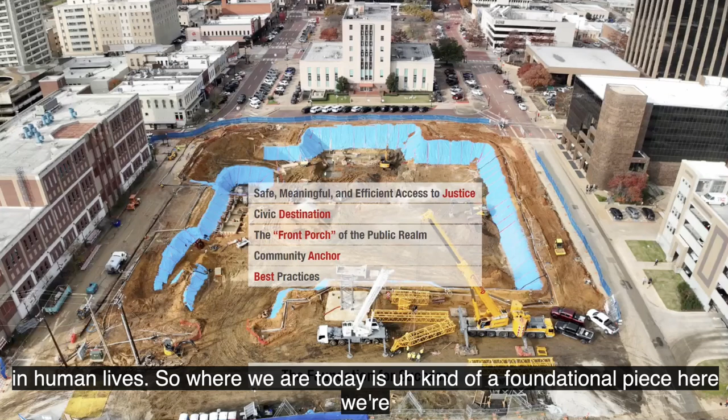So where we are today is kind of a foundational piece here. We're talking about an analogy, but we've got a foundation going on outside in construction, and we also want to talk about the foundation of the building process and how important it is to have a good plan in place and what that means for success for the project. We have several pillars we're working through, but our main pillar is safe building design, meaningful and efficient access to justice.

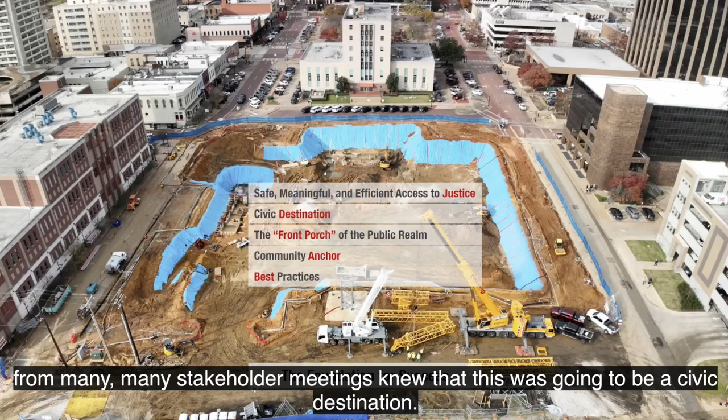We also, from many stakeholder meetings, knew this was going to be a civic destination. Our community wanted this to be a front porch to the public realm, and it's a community anchor. We're also going to talk about best practices.

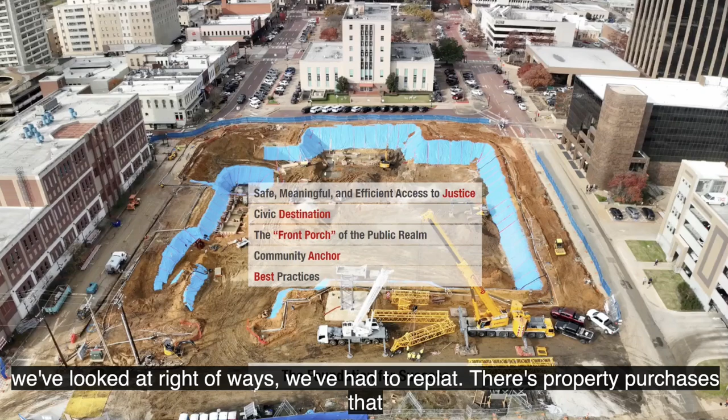The items you see in this view alone, and the due diligence that's gone into this - there's been talks with the railroad, Union Pacific. We've had to work on soils testing, geotechnical testing. We've worked with the city on joint agreements. We've looked at right-of-ways, we've had to replat, there are property purchases that have gone into place. There's a list a mile long of the orchestrated and collaborative effort that gets us to this point, which we'll look at as well.

I want to talk about the role of an architect in a project like this, because a lot of times we don't explain that, and I want to make sure everybody understands the architect's role here and what we bring to the table - that we ensure the owner's interest, Smith County's interest. We're here to ensure the project's success, to deliver a high quality, functional, safe, and aesthetically pleasing building that aligns with Smith County's vision.

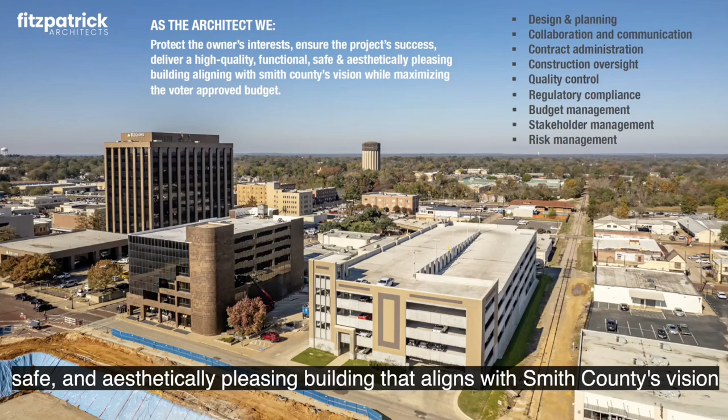While we maximize the voter-approved budget, what that means is many people think the architect is just the designer, the planner, drawing the pretty pictures. But behind the scenes, we also are the liaison between the owner, the contractor, the stakeholders. We communicate with all the engineers on site and make sure hundreds of stakeholders and professionals are all headed towards the same goal.

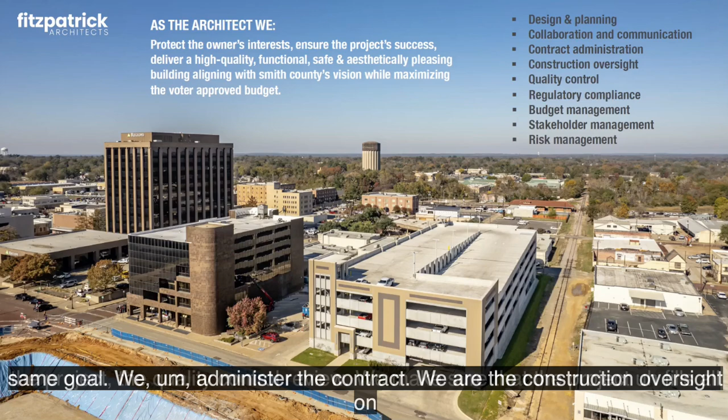We administer the contract. We are the construction oversight on the project, the quality control review. We make sure the project fulfills all regulatory compliance requirements, meaning Jail Commission, Texas Historic Commission, and Texas accessibility laws. We also manage the budget and make sure there's budget oversight so that we stay within the $179 million voter-approved budget.

We manage stakeholders, hundreds of stakeholders. We've had many stakeholder meetings and workshops on this project, including IT, security, the clerks, the judges. We've made sure everybody's voice is at the table from multiple workshops, making sure those pieces are implemented into the design. We are also here for risk management, looking ahead and making sure we're looking out for things that could hold us up.

I wanted to give you a little bit of a personal note on this. Part of our team is here: Daniel Romo and Abby Schluterman are co-project managers on the project.

This is just an example of our grouping at the office, where we were the control center for at least 80 plus engineers and specialists on the project. We worked in a room, kind of a control room like this, each involved in a separate focus on the project, whether it be site, structural, mechanical, electrical, plumbing, security, or detention standards. All of us managed those pieces with engineers and specialists.

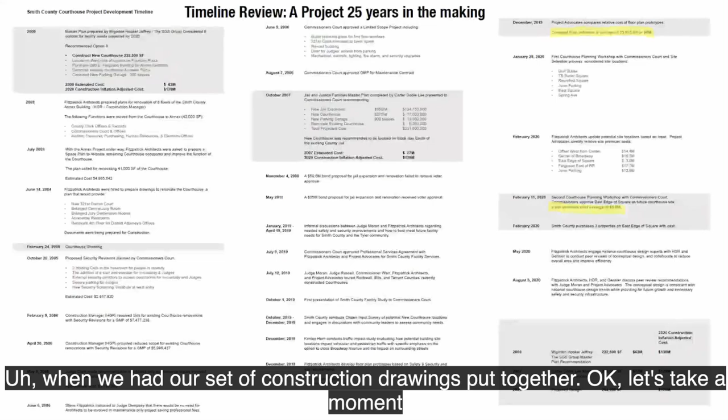Okay, let's take a moment and pause to look back at the timeline for the project. This is really a 25-year project in the making. Looking back at the overall timeline, this was a slide we looked at in 2019, going back to where we began in 2000. The highlighted gray areas were some milestones along the way. In 2000, 2007, and then starting again in 2019, we had three independent studies for what we should do with the courthouse.

Like we mentioned, in 2005 there was a courthouse shooting, and we began to see the trend that every time we had an independent study, we came up with the same requirements. We needed a new courthouse of about the same size we were projecting. We needed a new parking structure to handle everyone coming to downtown, and we looked at the budget and what that looked like.

In 2000, an independent entity prepared a study. In 2007, another independent entity conducted the same study with the same result. Then again in 2020, all roughly within that same 230,000 to 280,000 square foot requirement is what we needed, within a $125 million to $140 million project at the time. That's the 2020 construction numbers, which is what we call the total project cost, and we'll get into that in a moment.

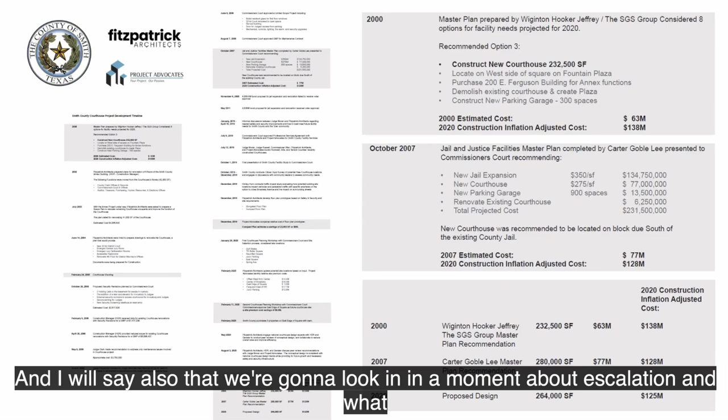Total project cost versus construction cost alone. I will say also that we're going to look in a moment at escalation and what inflation has done over the course of the timeline.

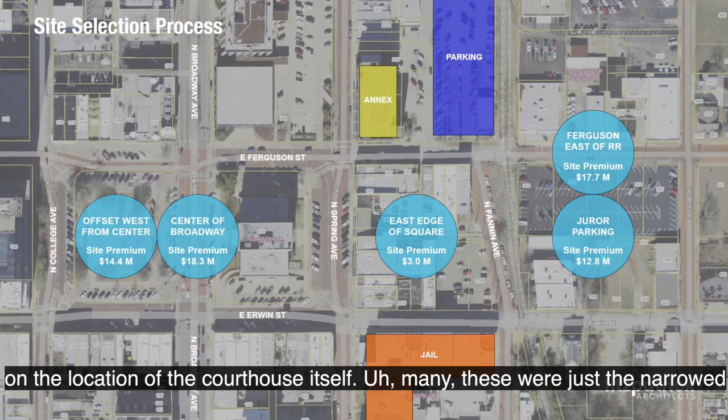After we looked at those studies, and we were charged in 2019 to start a new study, we came to the Commissioner's Court and had many workshops on the location of the courthouse itself. These were the narrowed down pieces where we looked at the best place. We looked at an elongated plan in the center of Broadway, and we looked at other places on the east side of the railroad tracks.

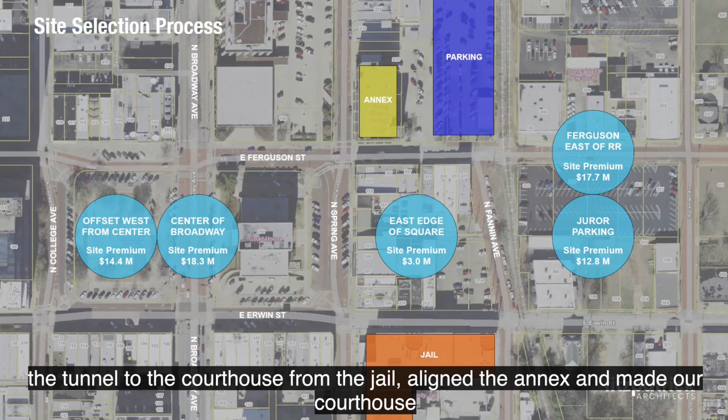But what it came down to was safety, security, and what would make Smith County the most efficient. So the east edge of the square was the selected site, primarily because it achieved the tunnel to the courthouse from the jail, aligned with the annex, and made our courthouse complex efficient. It was the site premium where the tunnel saved—out of all site locations, this one would save taxpayers about $10 million in tunnel construction.

We looked at the design and aesthetics of the previous courthouse and the stakeholders at the public workshops we had, and how important it was to look at the historical nature and details of that project and incorporate some of that language into the design of the current courthouse.

We looked at elongated plans, similar to this building, versus a more compact plan. We looked at the efficiencies and found a more compact plan was more efficient. It cut out about 25,000 square feet and saved the taxpayer, in today's dollars, about $10 million by going from an elongated plan to a compact plan.

So right off the bat, we're looking at ways to maximize the taxpayer dollar within the approved amount. In implementing best practices, once we had that site prepared and we knew that's where we were going, we were looking at a compact plan, and we wanted to look at what are the best practices for site design.

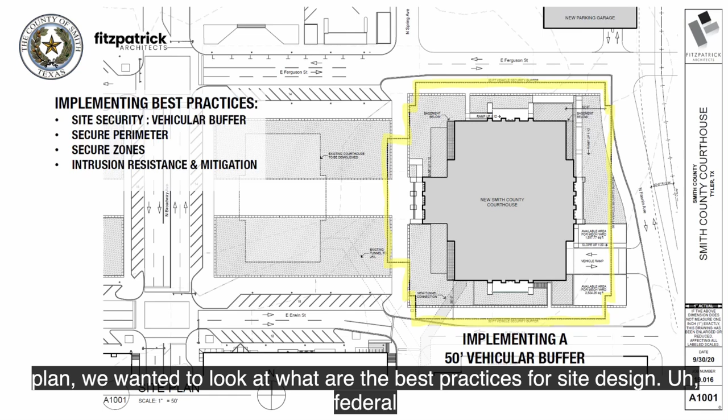Federal courthouses have a requirement of a 50-foot vehicular buffer around the perimeter of the courthouse. It's not required in county courthouses, but we wanted to see if we can implement that and provide the best practice for a vehicular threat to the courthouse. The yellow line represents that vehicular buffer. We were able to achieve it with that compact plan, working with the city and the county together to have Spring Street as a closed right-of-way, and how we can then achieve that vehicular buffer on the west side of the courthouse.

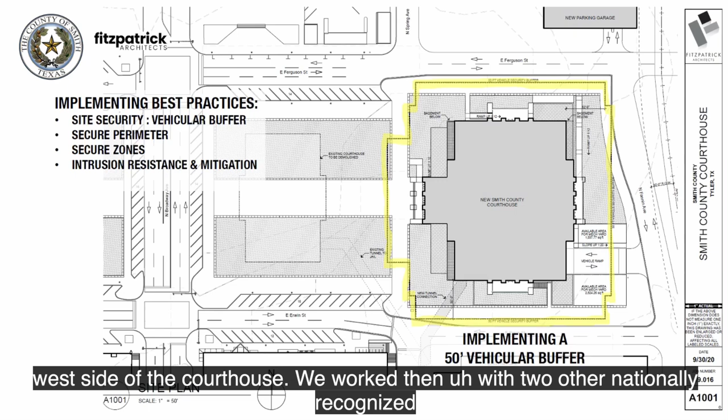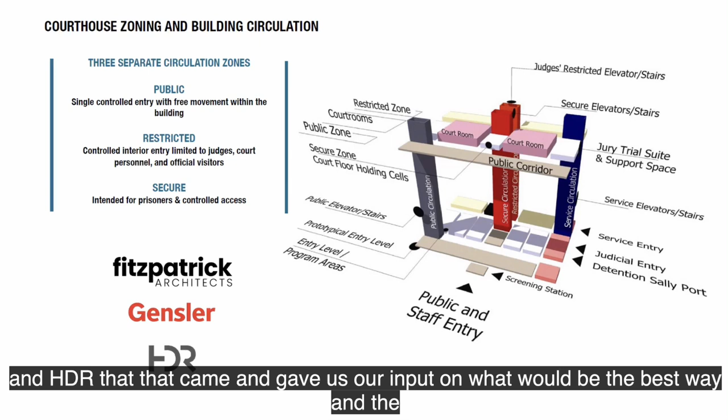We worked with two other nationally recognized firms, Gensler and HDR, as consultants to look at the security of the courthouse and the initial design of it. We worked on the main pieces that are the backbone of the design, which are the separate circulation zones, what our courthouse is missing now: three separate and distinct circulation zones for public, restricted, and secure. We had these peer reviews with our consultants, Fitzpatrick, Gensler, and HDR, who gave us input on the best and safest way to lay out this building.

We wanted our building laid out very much like this: parking and secure parking on the lower level, high traffic levels on the first and second floors for the public, court levels on levels 3, 4, and 5, and then our court on the 7th level, which we'll look at in just a minute.

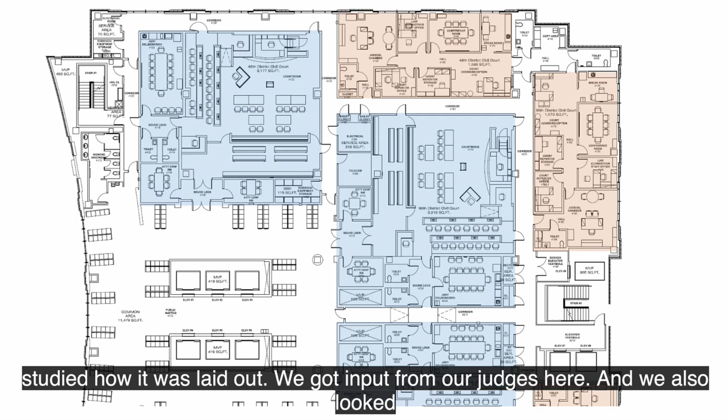Continuing on in this early stage, part of our best practice research was site visits where we looked at courthouses that had implemented best practices. For instance, we went to Tarrant County, Rockwall County, and Waxahachie County, and looked at the good, better, and best versions of security and how that was implemented. Tarrant County's court we really studied how it was laid out. We got input from our judges here, and we also looked at how judges' chambers and that restricted access was laid out there.

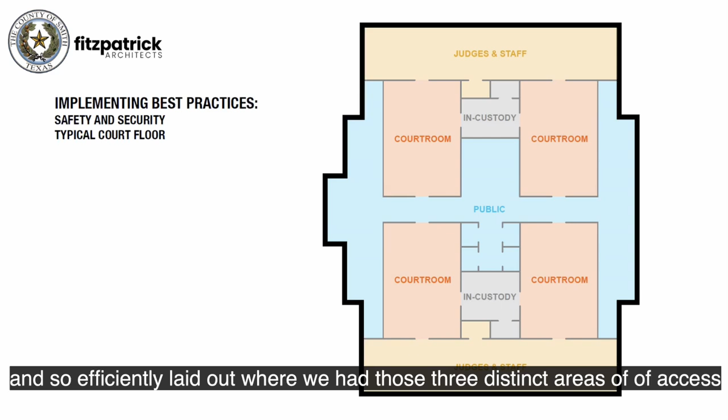We looked at the design, how the clerk spaces were designed, and then started implementing those into an early schematic design with the court floor, designed so efficiently that we had three distinct areas of access for the public, in-custody individuals, judges, and staff. Those three distinct circulation paths never cross, which is the best practice for security design. They don't cross vertically, and they don't cross horizontally.

We also knew, hearing from all the stakeholders, that this building needed to be a 75 to 100 year long building for generations to come. So that's also a piece we considered when looking at material specifications and the quality of the construction in this project, and what that means for the future.

So we had done all of that work and research. We had worked with Project Advocates, a third-party project manager at the time, for budget projections. We had done research with HDR and Gensler. It was time to talk about the potential to finally take this to the taxpayer with a bond vote, because that had never been done over the course of the last 25, or 20, years at the time. When we looked at the projections and thought about what was optimistic, probable, and conservative, we were hitting about $125 million total project cost in 2020.

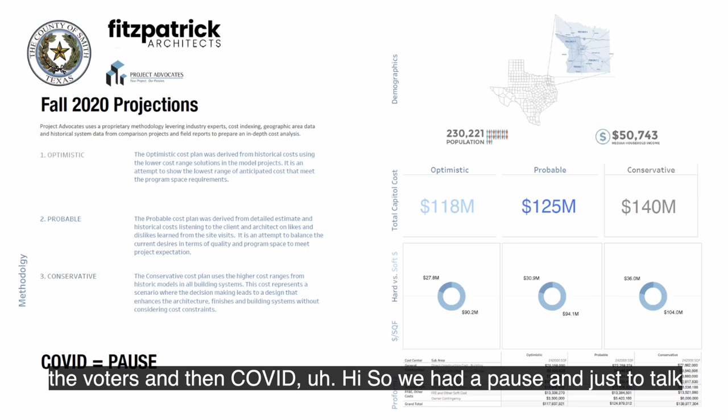And then, as you all know, we were about ready to go to the voters, and then COVID hit. So we had a pause, and I want to talk a little about what that did for us in terms of time and budget. The pause during COVID lasted until we resumed in May of 2022 to talk about going back to the voters again.

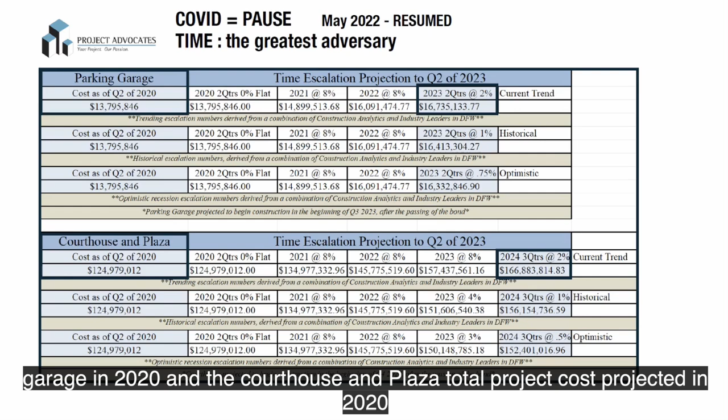This is an example of the parking garage and courthouse and plaza total project cost projected in 2020. As you can see, over the course of the 3 to 4 years until actual construction would have started, that escalation was going up about 8% per year, and the projections now were about a 28% increase over that time.

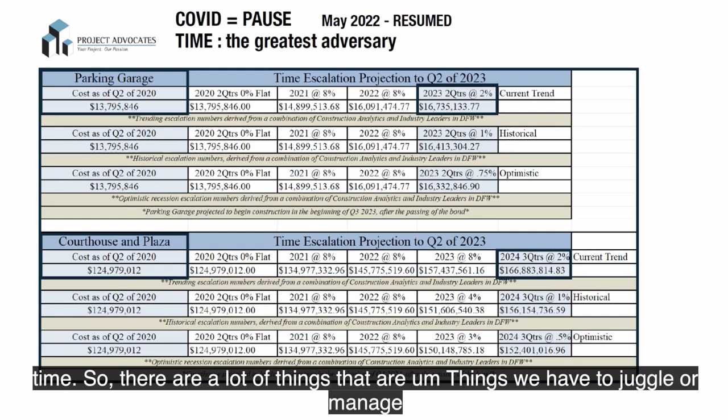So there are a lot of things we have to juggle or manage with the budget. But honestly, our greatest adversary was time. Time is what makes the budget increase on the construction project because of escalation.

So in May of 22, we did a projection looking at what the total project cost would be for the courthouse and the parking structure. This was forecasted at the time. The $125 million in 2020 would now be a request for a roughly $160 million building, and the $14 million projected garage at the time would end up being about $16.7 million.

That was decided at the time. Then the voter ask would be the $179 million, and you can see the estimated total project cost for the courthouse. Today we'll find out where we are actually on the parking structure, at $15,135,000, which is a great improvement. We were able to save and have a great improvement on the budget there.

So from that point on, voters approved the $179 million in November of 22. Starting then, and especially in January and in the spring, we started looking at a project delivery method that would complete a sort of checks and balances with the architect, owner, and a construction manager at risk.

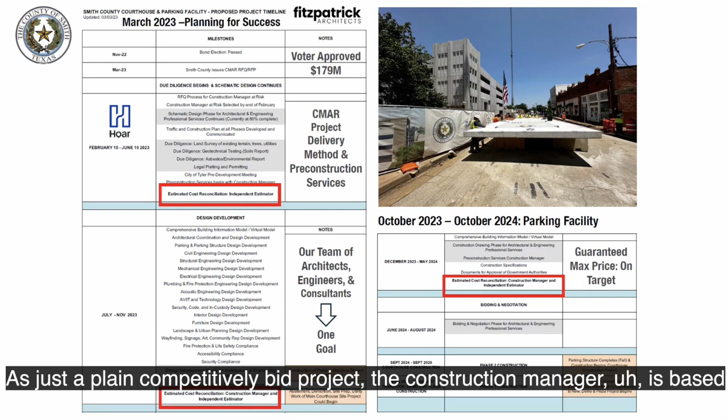A construction manager at risk is different from a plain competitively bid project. The construction manager is selected based on qualifications and fee, and comes onto the project early. What that does for us is he starts planning and doing pre-construction services which project the budget for us, getting real-time input from subcontractors. That puts us on track for milestones.

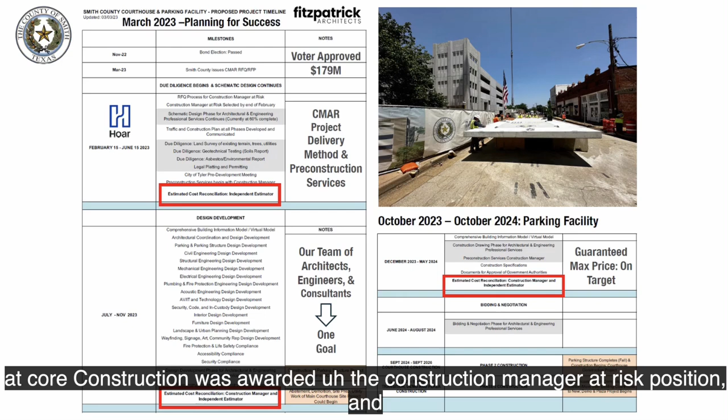So immediately when Smith County went out for the RFQ process, many contractors were looked at. Hoar Construction was awarded the construction manager at risk position. That became the project delivery method, and pre-construction services began.

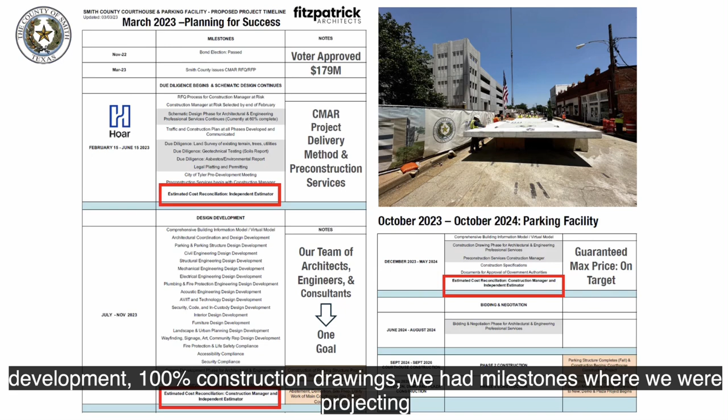We all started working on budgeting through the schematic design process, through the due diligence process, and at each milestone—100% schematic design, 100% design development, 100% construction drawings—we were projecting and double-checking that we were staying within the bumpers of the voter approved amount. In addition, we had a third party construction economist come on board to triple check us, and we had cost reconciliation meetings at each milestone to make sure we're all in alignment, because we wanted there to be zero risk on bid day.

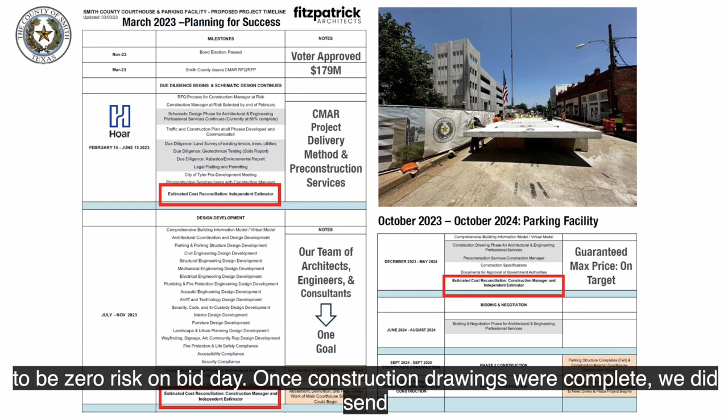Once construction drawings were complete, we sent out the drawings for a competitively bid process. Another benefit of the construction manager at risk is that when you receive competitive bids back, those are vetted, and the construction manager then gives the county a guaranteed maximum price. That is critical to the project—that's why it's called construction manager at risk. We'll talk to our friends at Hoar in a minute, but what that means is they've taken on the risk to ensure we have a guaranteed max price and to deliver this project within that amount.

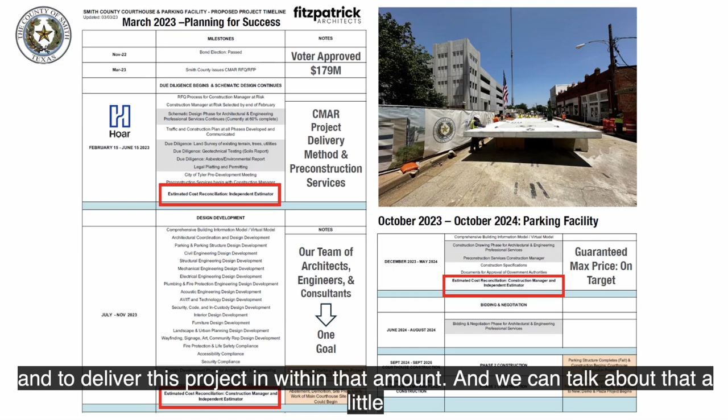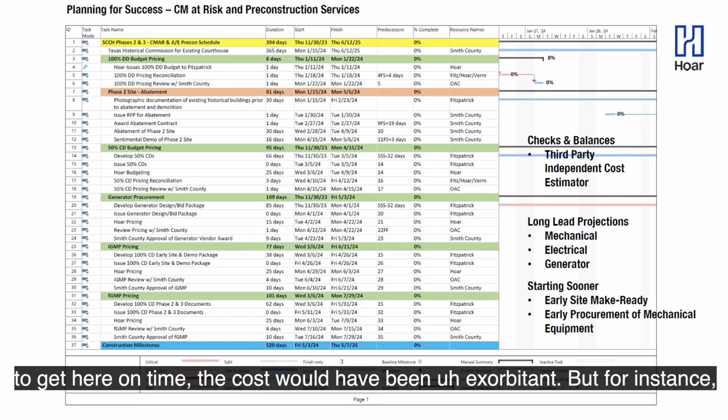Once Hoar came onto the team, we started looking at pre-construction milestones—abatement, budget pricing. One thing I want to point out, another benefit of pre-construction services, is that there are long lead time items, like the generator, mechanical systems, electrical systems, that if we had waited and bid those out, the lead times would have been impossible to get here on time, and the cost would have been exorbitant. Because Hoar recognized that a generator would have such a long lead time, we were able to go ahead and purchase that and have it on its way, so we could save the taxpayer dollars. That's what I mean by time being our greatest adversary when it comes to budget on a construction project.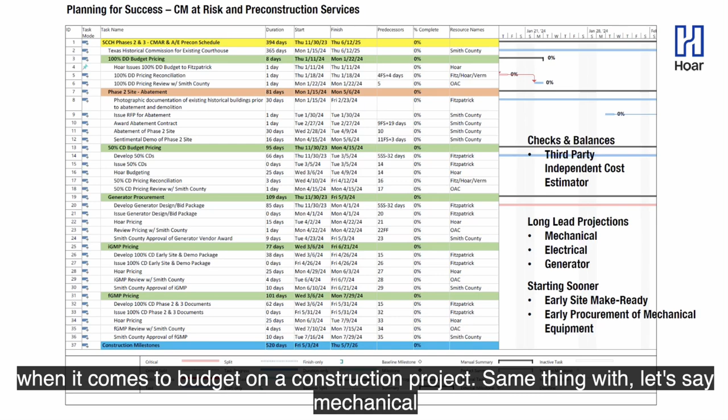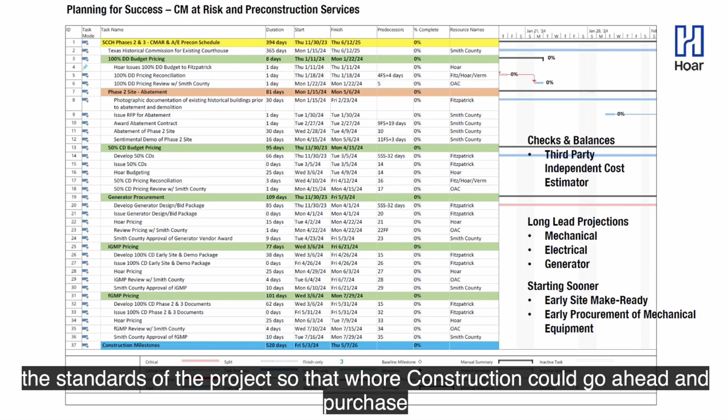Same thing with mechanical equipment—it was about to be procured. We get submittals into our office to review, to make sure they match the specifications. We found out that if we waited until this January to procure the mechanical equipment, there would be a huge cost increase at the first of the year. So it was in our best interest, and our team of mechanical engineers worked throughout the Christmas break, checking all the submittals, making sure everything met the standards of the project, so Hoar Construction could go ahead and purchase those pieces prior to January, so we did not have that cost increase and it would not impact the project.

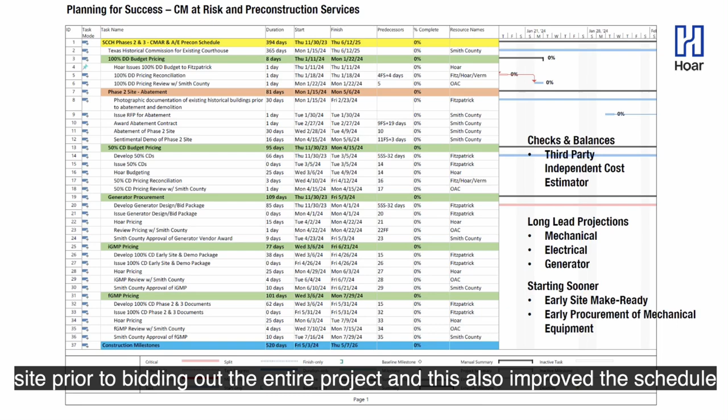Last example, because time is our greatest adversary, we looked at ways to improve the schedule and not have such a long project. Hoar Construction came up with the idea for an early site package where we would start a make-ready site prior to bidding out the entire project, and this also improved the schedule and saved dollars in the project.

A little bit about Vermeulen's, who is our construction economist and third-party person who came on board and did cost reconciliations for milestones throughout the project. They're a leader in the industry, and they came on board, and this is just an example of how this happened.

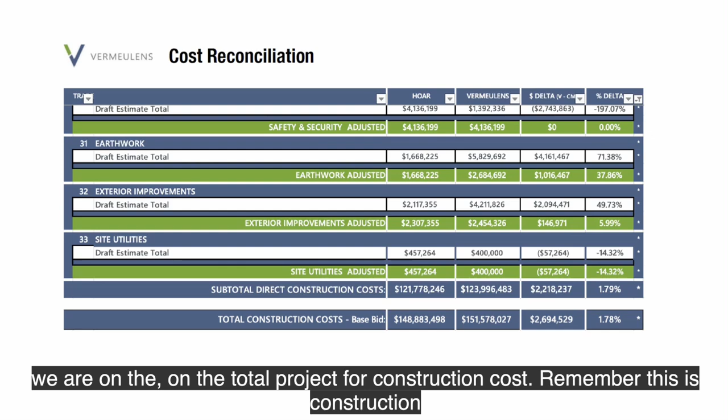Hoar's projections, remember this is still pre-construction. We projected each scope of work, let's say earthwork or exterior improvements or site utilities. Hoar Construction would project those pieces of work, and then once all those scopes were added up, we would total and say, okay, here's about where we look to be on the total project for construction cost. Remember, this is construction cost alone.

Then Vermeulen's would independently and separately take the same drawings and do the same exercise without any input from us, using their own historical data. Then we would all come back together and see where Vermeulen's was, and say, okay, how far apart are we? Where have we missed things? What's a trend that we're not seeing?

For example, this design development estimate, Vermeulen's was about 1.8% over where we were projecting. And I will say each time Vermeulen's was over where we were projecting. So what we would do is ask, what are you seeing in the industry that we're not seeing here? That would be part of the cost reconciliation, but it gave us all a really good check and balance of where we're going before we bid.

This is an example from about a year ago, almost exactly a year ago, when we were all orchestrating the very day to the very week of what we were going to be doing to get the project underway. We were looking at the parking structure. We were looking at talks with the Texas Historical Commission. We were documenting historic documentation of the existing historical buildings. We were doing price reconciliation that I just described, the parking garage.

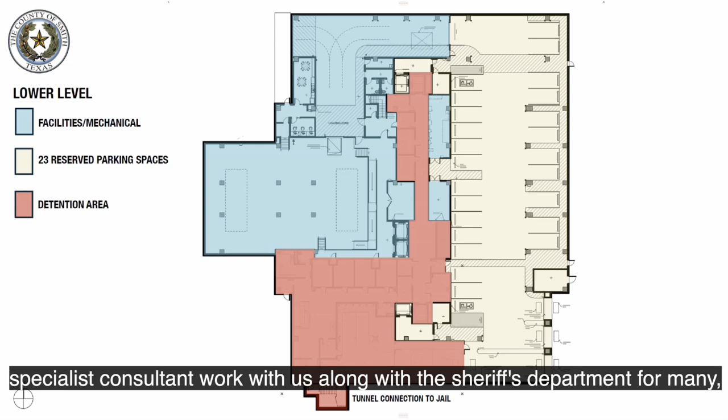Just a quick reminder of what that 268,000 square feet is made up of. We'll quickly go over these floor plans. We have a lower level on the site that is a detention area. We've had our detention specialist consultant work with us along with the sheriff's department for many meetings, along with Don Bell and IT on how all of this fits together. That same lower level is a secure parking level, and we also have facilities and a mechanical area downstairs in the basement level.

On level 1, we have 2 secure entrances, the public entrance on the west and the light blue staff entrance on the north. All people coming into the courthouse for safety and security will be scanned, and we have that set up so employees come in from the north and from that parking structure, and the public comes in from the west. We have a security office right at check-in, and then the district clerk in the northeast portion.

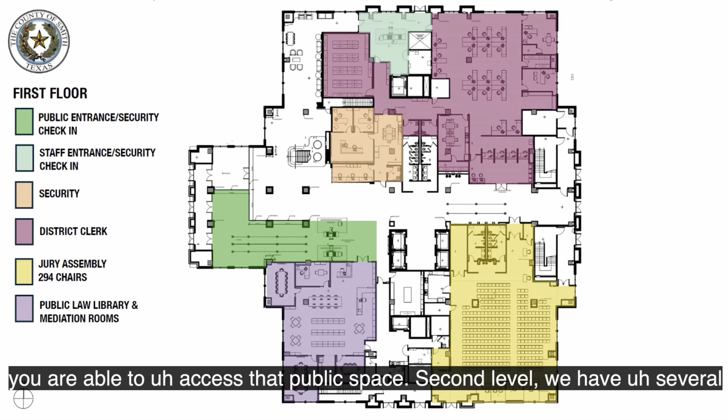And the jury assembly with 294, expandable to 300 chairs, in that multi-purpose space. Those chairs can be taken up and put back out in whatever format. We also have the public law library right on the first level. As soon as you go through security, you're able to access that public space. On the second level, we have several things we don't have now, like judicial compliance, the county clerk, and pretrial release.

We have additional conference room space, our grand jury space on this level, offices for court administration, and then IT support, along with our interpreter office.

We have levels 3 and 4, which are identical, with 4 courts each. These are our court floors, 4 courts, and then the public space in green. You get off the elevators, step out, and you can see all 4 courts at once. This is a great wayfinding piece for the public, but it's also a safety piece. All entrances to all courtrooms can be seen as soon as you get off the elevator.

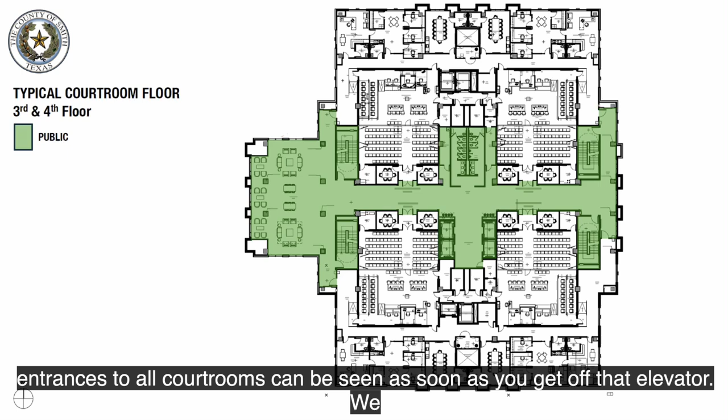We have our 4 courts, and an incredible addition to the courthouse design is a secure in-custody holding area that goes all the way up the building between all the courts from that lower level. So in-custody prisoners can be taken up, held here, and then brought into court, taken back and down, and never cross the path of the public or the judges and staff, which is what we're doing now in the courthouse. Judges and staff have a secure elevator from that lower level parking up to their space.

And then we have restricted access. This is something we gleaned from Tarrant County, restricted access where you have to be buzzed in to get back into the judges' areas.

One thing we heard from every site visit and every interview was the biggest mistake people made when building a new courthouse was that on day one they moved in and there was not room for future growth. It was their number one mistake.

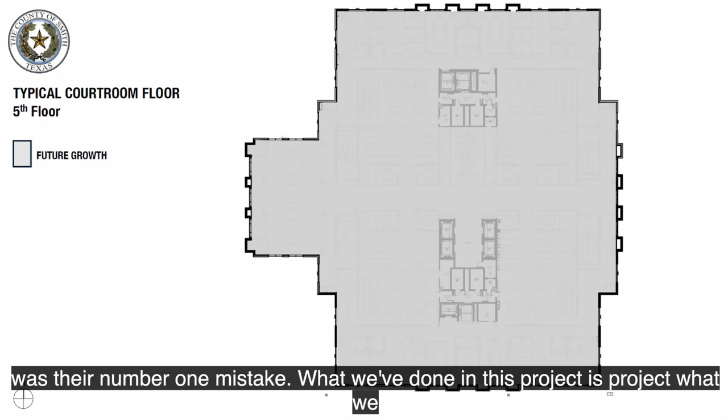What we've done in this project is project for the future and for future generations, that there will likely be 3 to 4 more courts, 2 coming online fairly quickly. And we have room for future growth for 4 additional courts on the 5th floor.

The 6th floor is district attorney space. He and his entire staff will be on one level, working efficiently with about 90 workspaces grouped by department, and he also has room for future growth. As courts come online, then his staff also has to grow to support those courts.

7th floor is the 12th Court of Appeals. On the south portion of the building, the green space is public, yellow is the courtroom, with a law library for them as well, and then their courts office space in blue. We also have additional room for growth on this floor as Smith County grows and we need more office space.

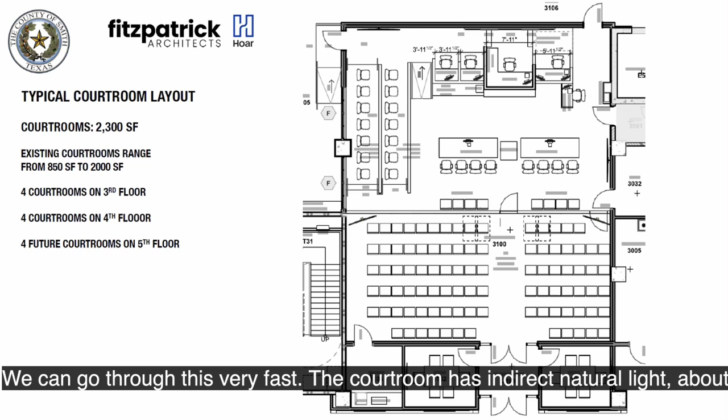We can go through this very fast. The courtroom has indirect natural light, about 95 seats, expandable to 100, 2 conference rooms, and a sound lock vestibule.

This is missing from our courthouse now, and is an example from best practices: the secure in-custody holding between every court, like we mentioned, and a secure attorney conference space, which we obviously do not have now in our courtroom, for attorneys to address and conference with those who are in custody safely.

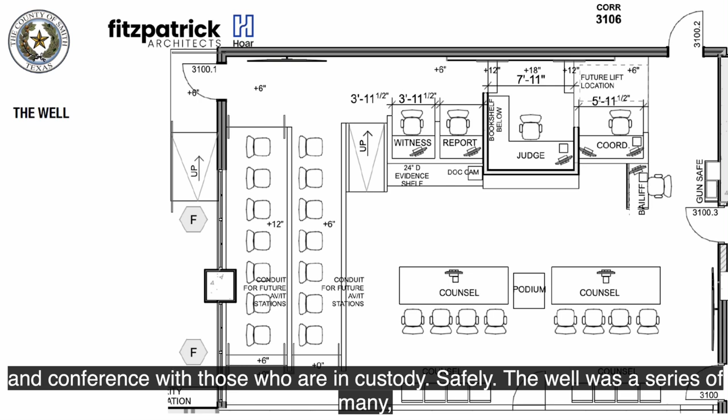The well was a result of many, many meetings and workshops with our judges to find out exactly what every single judge can live with, so that we can have the same layout and bench in every courtroom. This was a great collaboration between those groups.

We've had improved juror and jury space. If y'all have served on a jury lately, you'll know that we do not have this now, a safe and large enough space for everyone to get in the room and work. Many of our jury spaces now are in storage rooms in the existing courthouse.

A little bit of an overview. We've talked about the square footage, the occupiable square footage is 268,000. We're 7 stories. The project, everyone finds it interesting, will be a little bit taller than the People's Petroleum Building across the way. We have about 30 to 35,000 square feet per floor.

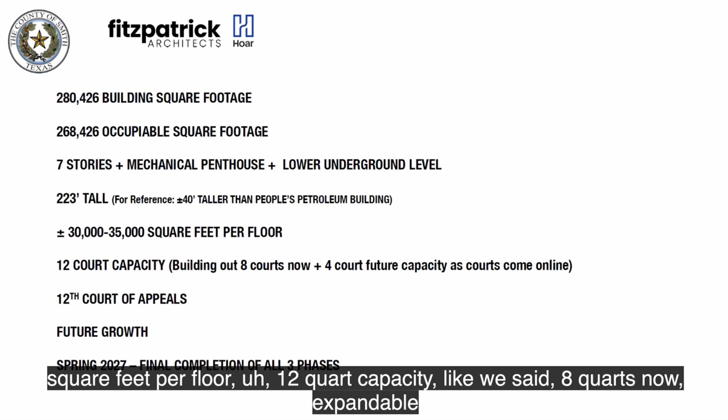12 court capacity, like we said, 8 courts now, expandable to 4 more in the future. We have the 12th Court of Appeals, and room for future growth. We plan to finish the courthouse, all 3 phases, in spring of '27. Which brings us back to this picture of where we are now, the foundation of the project.

We have over 500 rammed aggregate piers underneath this foundation pad already today.

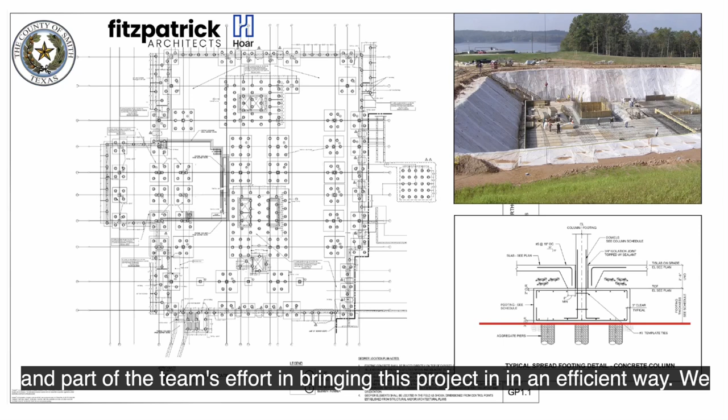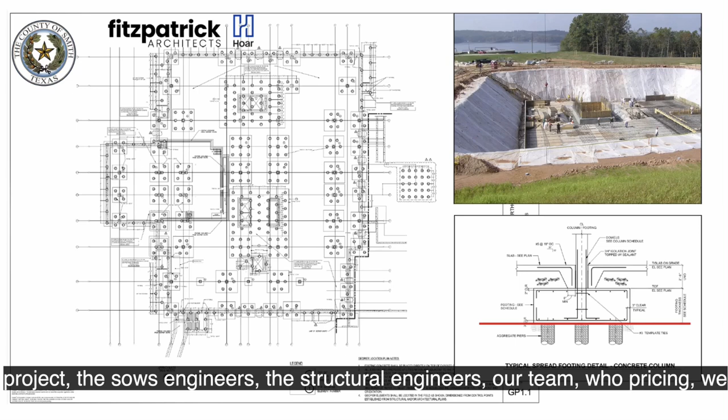Just a note on that, another anecdote. As part of the team's effort in bringing this project in efficiently, we looked at multiple foundation scopes and delivery methods for this project, one being an auger cast pile or concrete pile, and also looking at a rammed aggregate pier. The soils engineers, the structural engineers, our team, Hoar, pricing, we all looked at this, many calculations later, and we were able to save the taxpayer millions of dollars by using a different foundation system than what was first suggested.

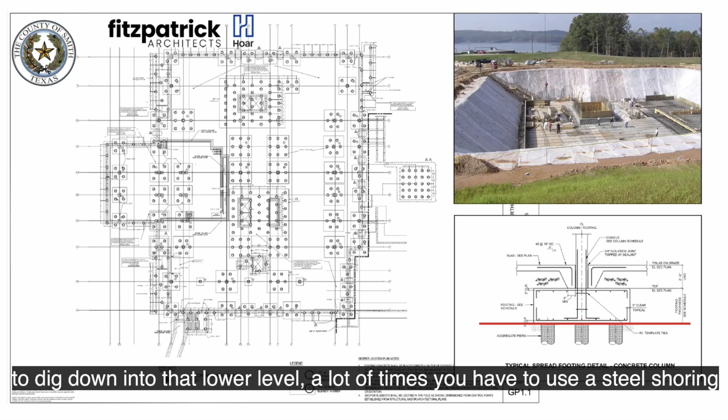In addition to that, Hoar Construction had worked with us on even the smallest amount of scope, which you might think we'll just pass by. But even the shoring of the site itself, we looked at originally shoring with steel structure because the site is so compact. When you have to dig down into that lower level, a lot of times you have to use steel shoring that is perpendicular, and the cost of that is great.

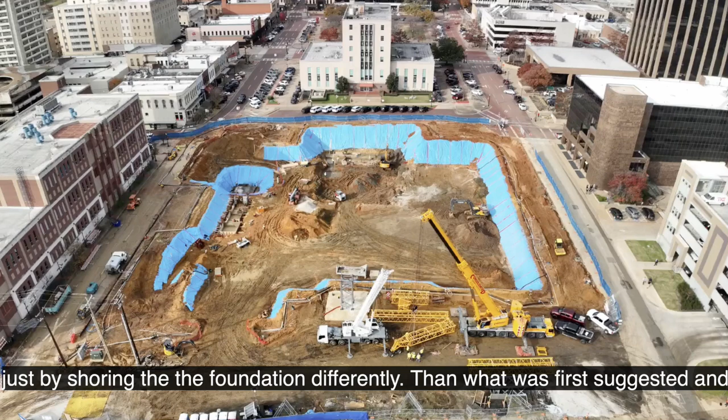So we looked at options for a different shoring technique. As you see now, this is an example on a best practice on another project. We worked with our soils engineers, our structural engineers, Hoar Construction, safety experts, and we were able to shore our project in a similar way. This saved $1 million or more on the project just by shoring the foundation differently than what was first suggested, and it was a huge team effort.

What we're doing is we're trying to look at every scope that way and be wise about how we get it done, making sure we're doing it with all of the criteria in mind for the future, for the quality of the project, and staying within the $179 million, maximizing that for the taxpayer.

Going back to this, and we're almost done. I know this is a lot. We're trying to get a big overview here. Going back to the overall budget, I want to describe these numbers and our $179 million broken down a little bit more on this following page.

This is best if we start at the bottom here at the total project cost, because we know this is our guaranteed max price, voter approved amount, $179 million. Working our way back up, I want to explain the overall breakdown of the budget. We've come in with the parking structure much less than was originally anticipated, and we have a savings on that project that comes back into the project overall.

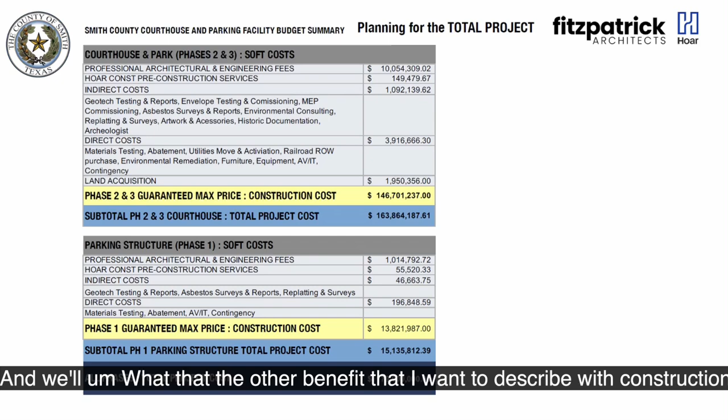The other benefit I want to describe with construction manager at risk is if we see savings in the project, those savings come back to Smith County, and that is different than a hard bid project. I'll explain briefly: if we were just to send this out to contractors who competitively bid this alone and get a price, that's the price we pay, and we never see savings. The contractor has said, I'll do this project for this amount, and that's what he'll do it for.

Because we have a construction manager at risk, their job is to look at all of the savings possible on the table, and that's what we're doing, like I described in every scope. If we can see savings, that comes back to the project and can be implemented in other areas for the taxpayer benefit. That is a huge perk to this process.

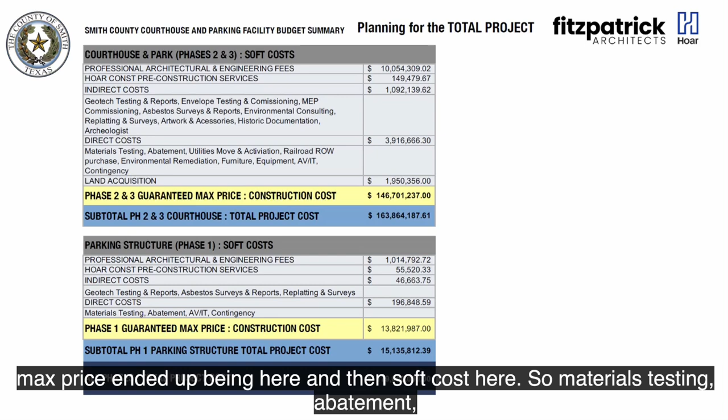That's what we've seen on the parking structure coming in under what we originally bid, what the competitive bid was for. So the guaranteed max price ended up being here, and then soft cost here: materials testing, abatement, contingencies, geotech, asbestos reports, replatting, surveys—those are all direct and indirect costs, along with professional architect, engineers, and construction management fees. That is what ends up being total project cost.

Similar on the courthouse, this total project cost is the compilation of the guaranteed max price, which is what we have now on the courthouse. I'll say it's right on target, and as you can see, it takes all of these efforts. That didn't happen by accident. It takes all of the projections and all of the efforts to hit this number right where we needed it to be successful.

That's our guaranteed max price that's already been competitively bid, and Hoar Construction has given us that amendment on the project. Then land acquisition, direct cost, indirect cost, and fees include everything from furniture to what is needed in the building, because we don't want to just say here's the construction cost on the project, but now the taxpayer doesn't have everything we need in the building. That's a total look at the budget and total project cost.

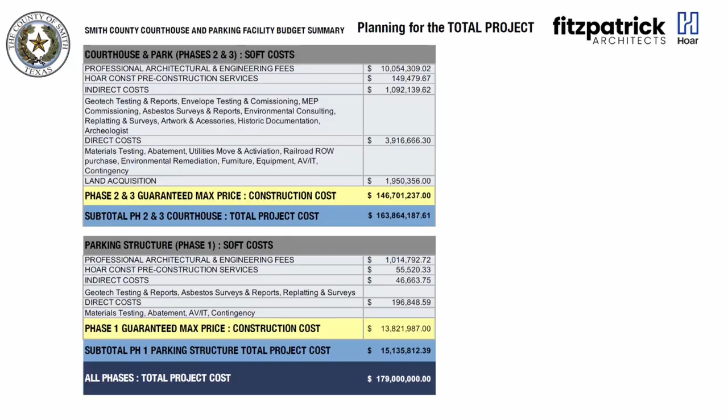The second milestone is that we started the construction project for the courthouse on time and exactly when we said it would be, and exactly at the price that we projected it to be, which is huge because what is our greatest adversary? It is time. If we had missed those marks and drug out another six months to a year, you can see what the escalation would have been on the project, and we would not have been able to bring it in on time, on budget.

Overall, the phases of the courthouse project: summer, which we started in 2024, through summer of '26, is the plan for moving everyone out of the courthouse, then demolition, the transition, and the new green space in front of the courthouse, finished by spring of '27.

Traffic is working out in a very efficient way, and I feel like Hoar Construction has done an incredible job of keeping traffic on the east side of the square, efficiently bringing trucks in and out of the site, and working with the neighbors to make sure everybody feels safe.

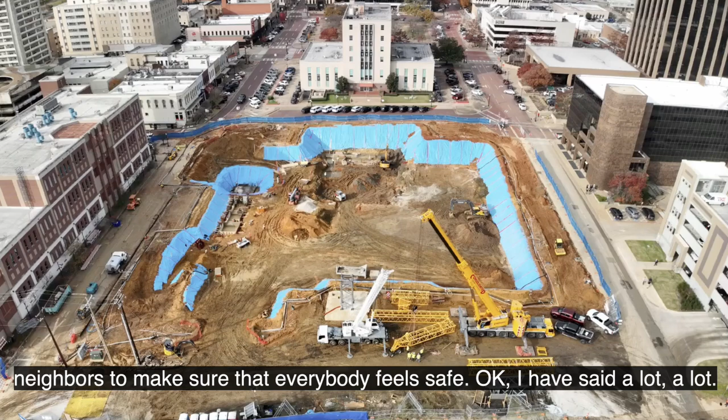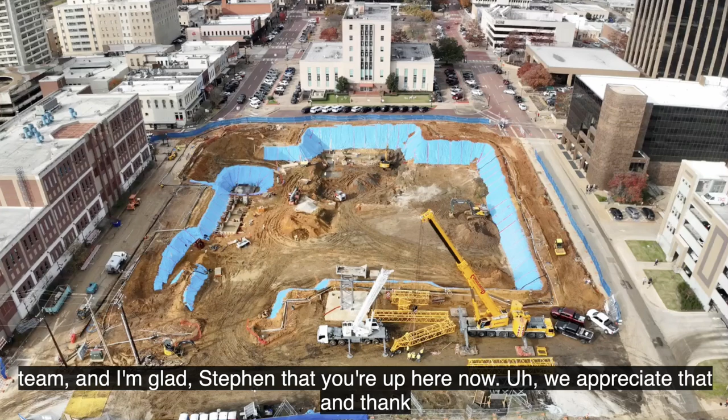Okay, I have said a lot. I wanted to ask Stephen Flournoy if he would come up with Hoar Construction. Our team here: Daniel Romo, Abby Schluterman, Stephen, and Bradley Barr, the superintendent on the construction project. Y'all are tired of hearing me talk, but I wanted to make sure you introduced your team, and I'm glad, Stephen, that you're up here now.

Thank you, we appreciate that. And thank you so much, Brandy, that was very thorough. Everybody in the audience has learned a lot today between our legal team earlier and you today, so that was fantastic. I'm sure there will be a few questions, but Stephen, if you'll take it from here. Yes sir, thank you very much.

Brandy gave a great overview of what we've been doing, basically. Hoar has been part of the team for roughly 2 years now, from the time we competed for the job and were then awarded the work and started to become part of the team.

We're the people that signed up for this deal, right? We guaranteed the price and we took all the risk. So we're proud of that, and we're continuing to deliver on that promise every day. We've succeeded in phase 1 of the project on the parking garage, and right now our team every day is focused on delivering all the things that Brandy just described.

The photograph you see here is taken from the east side of the site looking west, back toward the existing courthouse. Brandy pointed out that our excavation is a sloped design that allows us to save the job a tremendous amount of money.

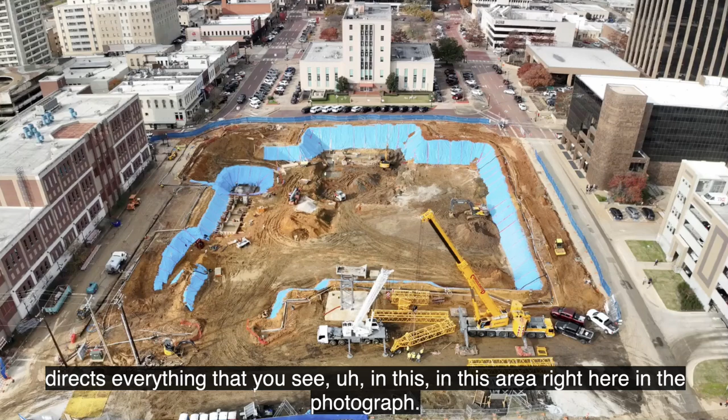Bradley Barr, sitting on the front row over here, is the other half of our leadership team. Bradley directs everything you see in this area of the photograph. He's a gentleman I've known for probably 15 or 16 years now, and I was honored to come here and be part of the team he's leading to help build this job.

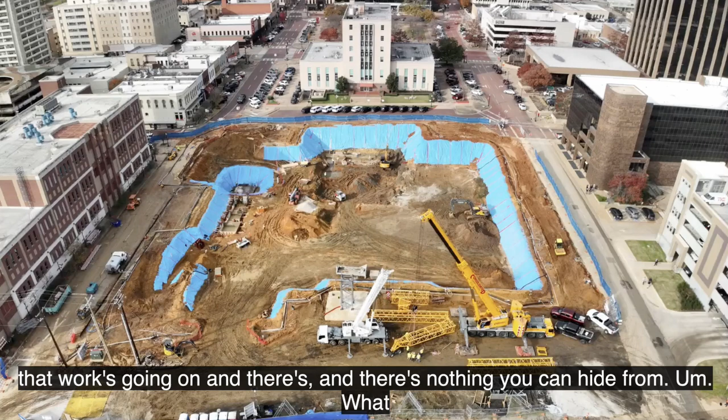This was the day that we became- we could not hide after this day, I'll say. That's the day our tower crane went up. Lots of things happened behind that fence for a number of days and months, but once you put up a crane the size of that one, everybody knows work's going on, and there's nothing you can hide from.

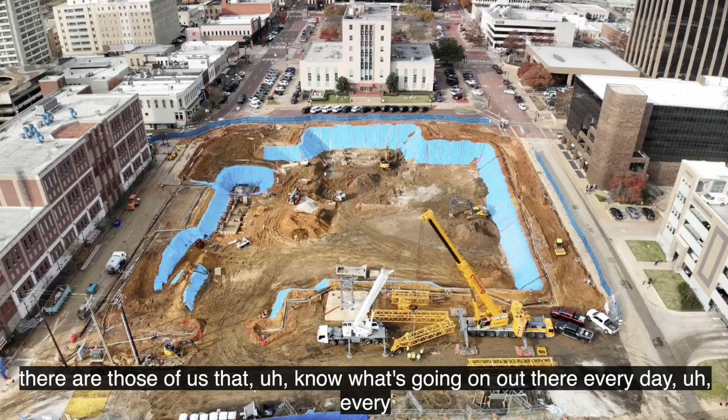What you also see here, and we've got a couple of other things, the fun stuff- we'll show some videos, a time lapse, and some drone videos. We have a camera that constantly watches this job, and even if you don't see us out there walking around, there are those of us who know what's going on out there every day, every minute. Our drone photos- we fly the site every couple of weeks, and it really paints the picture and tells the story.

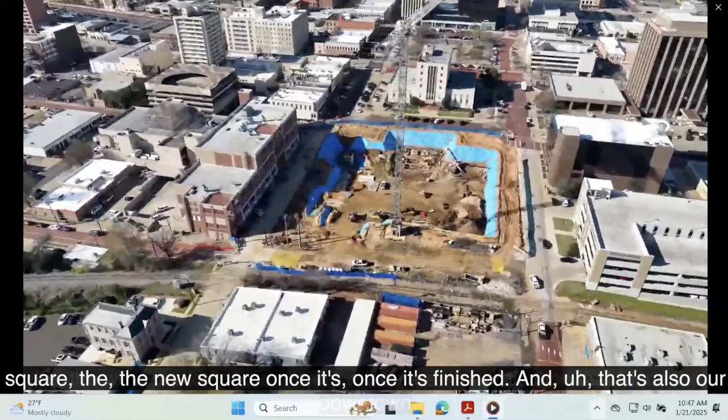I know a lot of folks have seen the time-lapse video of the parking garage, but here's one of our drone videos- we fly it professionally every 2 weeks. You're seeing our deep excavation, our tower crane, and some of the largest portions of the job going in right now. The west portion of the project will be the projection that faces the downtown square, the new square once it's finished.

And that's also our mechanical area- here at the bottom of the screen. It's the deepest part of the actual structure itself, and we've got mechanical equipment that goes in that basement. To the right-hand side is actually the deepest part of the excavation, and that is the stair tower that leads down to the tunnel.

So that's the connection that we'll make. Our new portion of the tunnel will work its way south. We're headed west underground, and we will intercept that tunnel just about at the intersection where Irwin Street and Spring Street meet.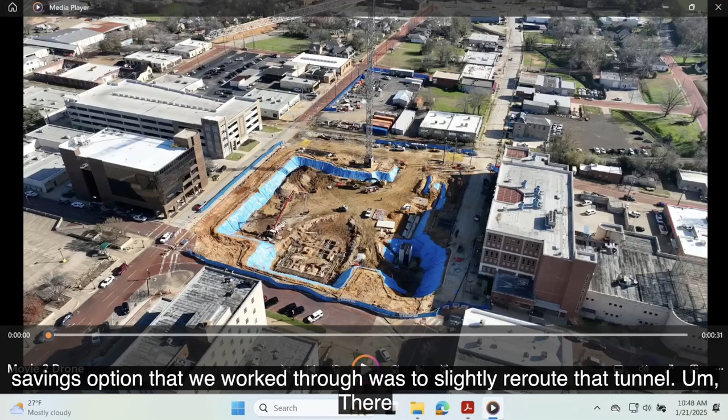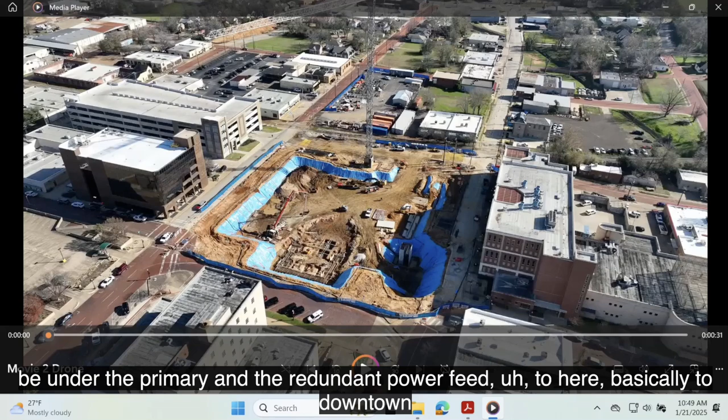Another cost savings option we worked through was to slightly reroute that tunnel. There were a lot of concerns that the design team and Hoar Construction had about excavating underneath Erwin Street and a number of utilities there. There are two primary power feeds that come up Erwin Street, and Hoar is an extremely safety-minded organization. We did not want to be under the primary and redundant power feed to downtown Tyler and all the businesses that surround it.

So we worked diligently with consultants, third parties, Oncor, energy folks, gas folks, to look at a reroute and slightly adjust that to save the job some money and keep the project out of risk.

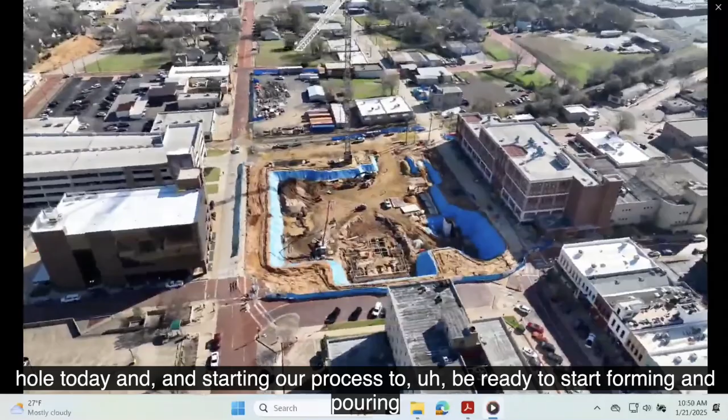So you're looking at about 35 or 36 feet deep in that bottom right-hand corner. We're backfilling part of that hole today and starting our process to be ready to start forming and pouring the tunnel. We do have some vertical shoring going in now. If you've been downtown the last few days, including over the weekend, I'm sure you've heard it—unfortunately we have to forcefully drive 40-foot plus deep sheet piles there in order to make that a safe excavation to get over and tie into the tunnel.

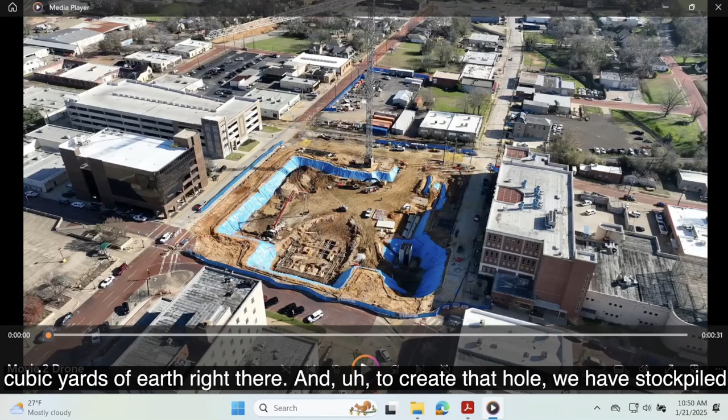A few tidbits of information: what you see in the picture, we've excavated roughly 40,000 cubic yards of earth, and to create that hole we've stockpiled and saved roughly 10,000 cubic yards of that dirt in order to backfill the basement at the existing courthouse once that demolition is done.

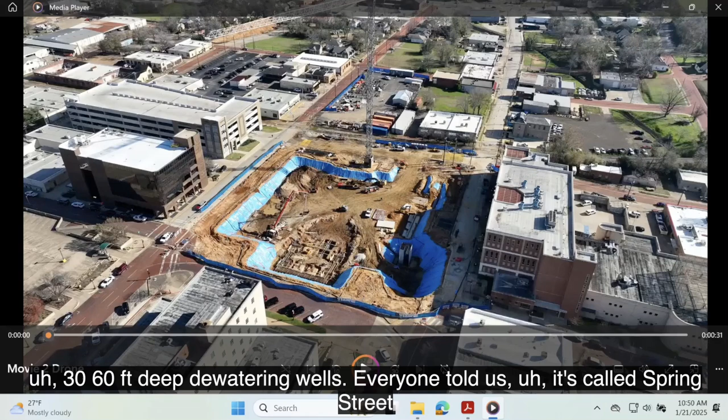In the time lapse you may catch it—I'll try to point it out—but we've installed as our first step 30 sixty-foot deep dewatering wells. Everyone told us it's called Spring Street for a reason, and we believe them. So we've had a very successful run right now at maintaining and mitigating water from getting into our excavation.

Brandy mentioned and showed you the diagram of over 500 rammed aggregate piers. You'll also see in this picture some footings in place. They're not as readily obvious to you guys as they are to us, but as of today we've roughly poured about 2,000 cubic yards of concrete that we put in the ground.

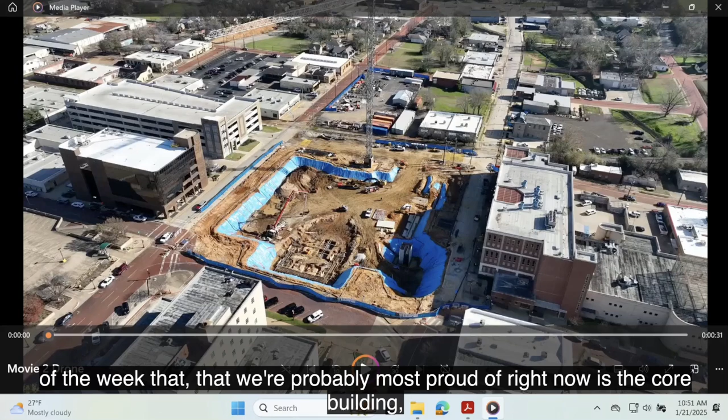One we poured this past week that we're probably most proud of right now is the core building foundation and the main elevator shaft footprint—that's 560 yards of concrete in a single excavation. This entire courtroom probably would fit in that one footing we excavated and poured last week.

She mentioned we call it 8 floors of structural concrete, so we have a below-grade level and 7 floors above. We also have 1 floor of structural steel on top, and then the part of the building that will make downtown famous would be the dome and the cupola piece of it.

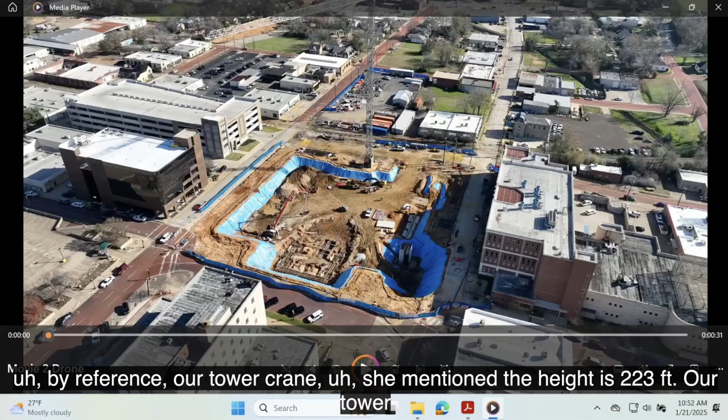By reference, she mentioned the height is 223 feet. Our tower crane's hook height sits roughly 30 feet above that. I climbed it this past Saturday, so I'm still kind of tired from doing that—I would not recommend it unless you're very athletic.

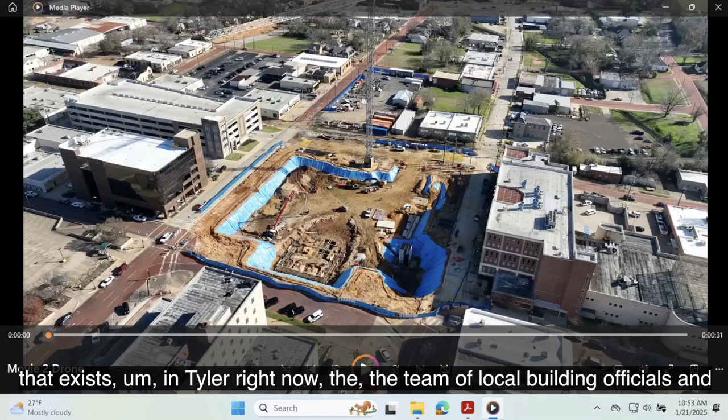But it's tremendous, a tremendous opportunity to be here transforming downtown right now, and our team takes it very seriously every day. We appreciate all the work that's gone into this, and the team of people in this room and outside this room. I've been doing this for a lot of years, and the coordination and positivity that exists in Tyler right now—the local building officials, local agencies, Sheriff Smith, the group in the jail who constantly allow us to come in, get down, look at that basement, take measurements and plan things—they're tremendous. I'm glad Casey went ahead and started this time lapse.

So here's the ugly part, where we had to take down the block. Demolition went well.

You're going to see maybe about a minute or a minute and a half. It's interesting that we can compress 6 months of work into a minute and a half.

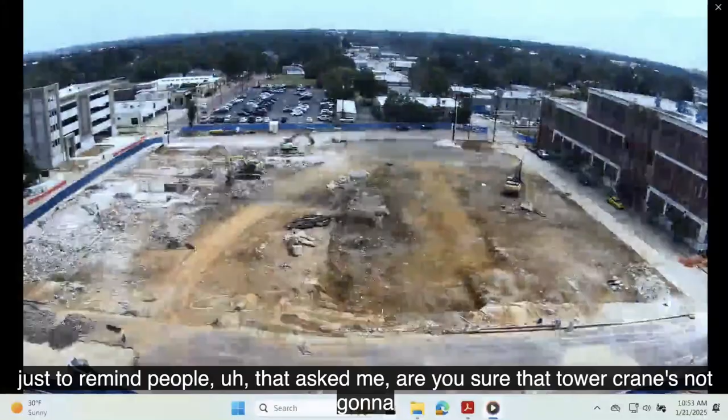Just to remind people that ask me, are you sure that tower crane's not going to fall? How many truckloads of concrete are in that base? It's an extremely large footing. There's probably 15 truckloads of concrete, a bunch of number 11 rebar. If anybody knows what number 11 rebar is, it's about as big as your fist. It's an entire mat slab, basically, and that foundation will be there forever unless somebody wants to come take it out.

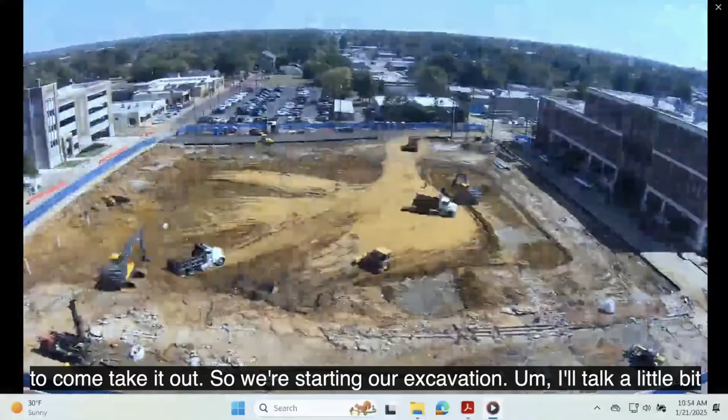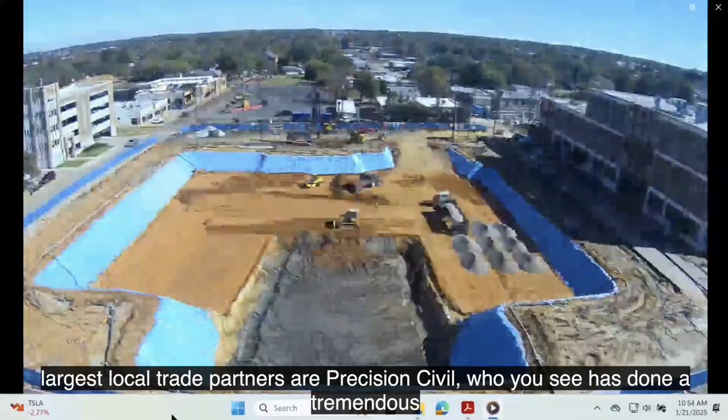So we're starting our excavation. I'll talk a little bit as that's going on in the background. The other thing we're proud of is that roughly 56% of our contracts were issued to Smith County and or East Texas trade partners. That's a tremendous amount of money on a job this size. Our largest local trade partners are Precision Civil, who has done a tremendous job excavating this hole for us. We've got Mosby Mechanical, Stiles Electric, East Texas Steel, and Tommy Williams Drywall, Wind Tile. Those are some of our larger contracts for folks right here. They're on our team right now, working through every day, coordinating all the underground things that happen and the things that will happen above grade once we get there.

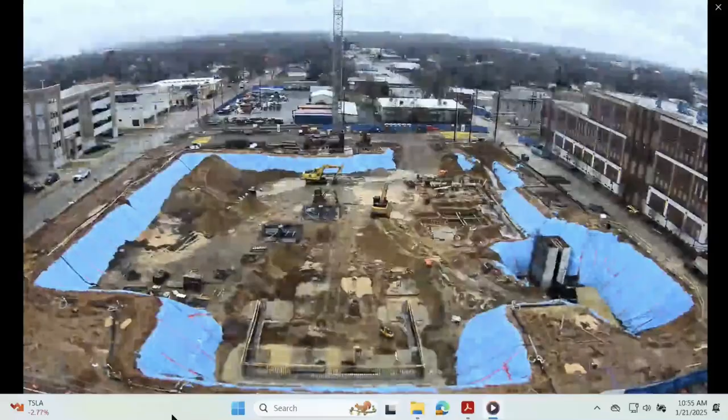That was fast. So that's the easy part.

Yeah, well thank you so much. I'm sure there's going to be some questions in just a minute. I do want to point out, thank you, Brandy, Daniel, Abby, all y'all's team. Thank you so much. Stephen, thank you. Bradley, thank you. And I want to point out two people that are really in charge of oversight, Jay Latch and Frank Davis on our team. I'd be bad if I didn't mention our IT director as well, Don Bell. He's been part of it. Our security sheriff, I'm gonna leave somebody out, I know. Lieutenant Lazarin, he's been fantastic helping with all his ideas on security as well. So thank y'all very much.

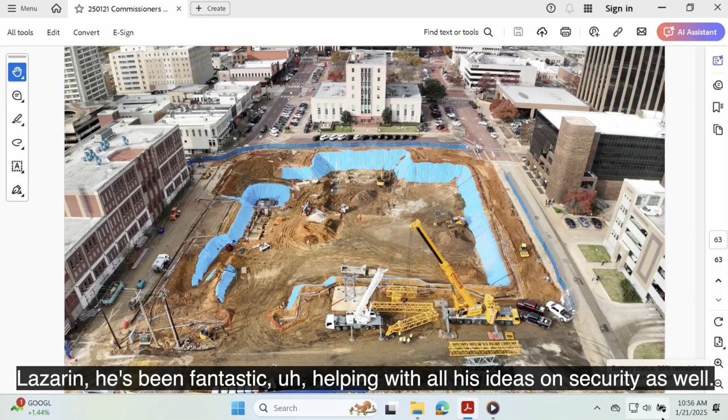Any questions from the court right now?

I just want to tell you thank you for that presentation and catching us up since we're the new members on the court. That was outstanding. Yes ma'am, thank you. All right, thank y'all very much. That was fantastic. And we will have them back periodically as we move forward in this. So thank you very much.

All right, that needs no action from the court. And thank everybody else for being so patient. I know y'all have got some things on the agenda.

Item number 4, consider and take necessary action to adopt a resolution supporting the efforts of the Tyler Area Chamber of Commerce Veterans Committee to have the state of Texas name a portion of U.S. Highway 69 as Veterans Memorial Highway. Today we have Jackie Clay here from that Tyler Area Chamber of Commerce Veterans Committee. Ms. Clay, if you'll come up and first just introduce the folks you have with you, that'd be great.

Okay, fantastic, thank you so much. My name is Jackie Clay. I'm the chair of the Tyler Area Chamber of Commerce Veterans Committee, and we have quite a few folks from the committee here, if you all don't mind to stand. I'd like to say thank you so much to Henry Bell, who's the president and CEO of the chamber, for his leadership. So many great folks - Jim Snow, who is co-chair, a retired Lieutenant Colonel, co-chair of the Veterans Committee. Folks that our committee consists of - veterans serving organizations, veterans, and concerned citizens.